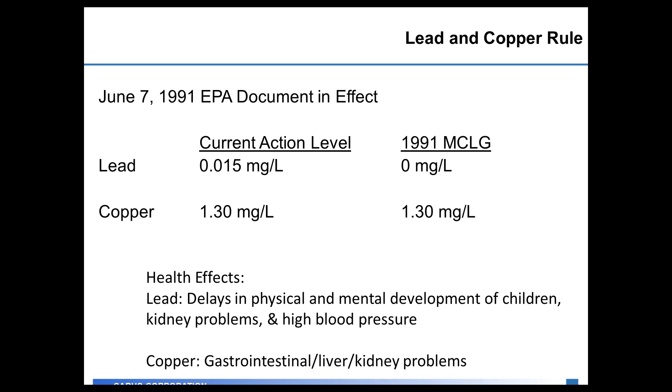The lead and copper rule is an action level. So an action level is different than a maximum contaminant level because in the distribution system, you only need to have 90% of the samples meet the regulation.

So what happens is the customer samples are collected and they're listed from lowest to highest, and you go up 9/10 of the way on the list, and that's the number that's used to determine compliance with the action level. So you're allowed to have 10% of the samples in the system be over the action level for lead and copper and still be in compliance in the distribution system.

Originally, the frequency is every 6 months for initial monitoring. If you continue to meet the action levels, you eventually can go to monitoring once a year, and then you will go to half the number of samples that you have to pull. And then finally, if you continue to be in compliance, you go to once every 3 years at half the samples for the system.

This rule is different than most samples because most samples are taken at the water plant for the water going out through the distribution system. Specifically for the lead and copper rule, this is a sampling of a first draw. This means the sample has to be 1 liter of water from a cold water tap that has not been used for at least 6 hours in the consumer's home.

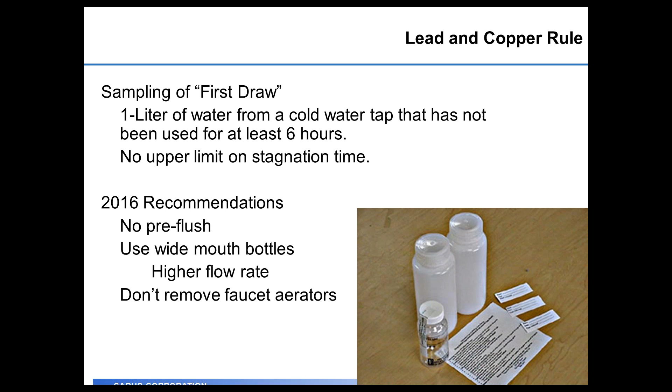So you collect your sample from the consumer home and you report your compliance. There are actions required if you have an exceedance, meaning you fail the lead and copper rule. The first part of that is distribution of public education. You need to notify your consumers that you had a violation of lead and copper rule and what that specifically means for them.

One of the things that Flint, Michigan brought up at the beginning of this year was that they needed to make sure that you notify the public within a timely manner for what the results were for their system. After you violated the rule, you also have increased monitoring of consumer taps.

If you were on reduced monitoring, which means samples every 3 years and half the number of samples, you now have to go back to the beginning and pull samples every 6 months and the full number of samples throughout the distribution system.

In addition to that, you're required to develop and submit a corrosion control plan, which tells what you're going to do going forward to prevent another lead and copper exceedance. This could be adjusting pH, alkalinity, hardness, or adding a phosphate-based corrosion inhibitor to the system.

Ultimately, they could also tell you to have actions required of a lead service line replacement out in the distribution system, and you should replace approximately 7% of your lead service lines per year. That's kind of a last resort for the US EPA in the States, but it's one of the things that's come up recently is that maybe we should focus on doing lead service line replacement going forward.

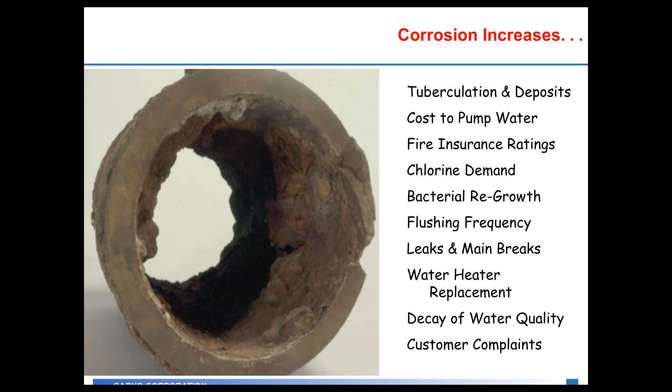Overall, all these issues above lead to a general decay of water quality in the distribution system, whereas the water leaving the plant may look crystal clear, may taste well, but by the time it gets to the consumer, it's picked up off flavors, off colors, and turbidity issues when it reaches the customer's home. All those things at the consumer's tap are going to lead to customer complaints, and they're going to either call you at the water plant or call someone at City Hall to complain about the source of their water and what's happening in it, and is it safe to drink.

When we talk about corrosion-influencing factors in drinking water, we really talk about four things. There's the electrical component. You have different types of metals in the distribution system, whether it be cast iron, lead, or copper, and you have water, which all can conduct electrical current. You have the chemical makeup of the water itself. So these are the things you measure at the water plant on a daily basis: the pH, the alkalinity, the total dissolved solids. The chemistry of the water going out the door impacts how it affects the distribution piping.

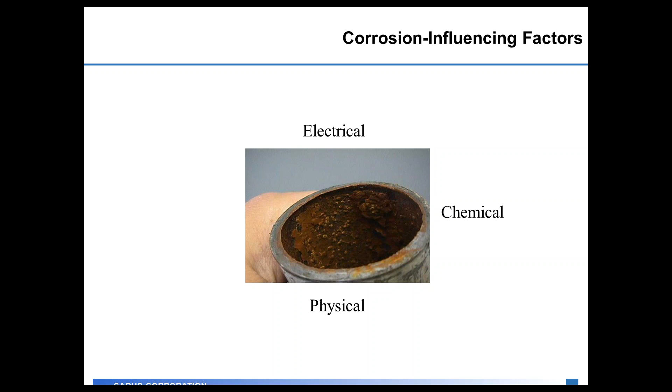There's a physical component. So what is the makeup of your distribution system? Do you have a lot of lead service lines out there in use? Do you have a lot of older homes that have copper piping with lead solder? Do you have cast iron distribution mains? Do you have a lot of plastic PVC pipe in the distribution system? You know, what's the physical makeup of your distribution system?

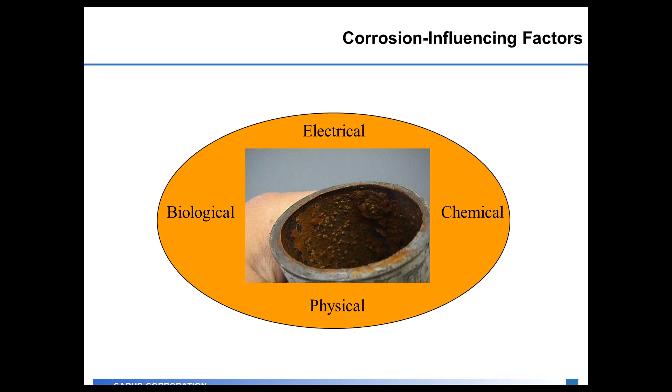And then finally, there's a biological portion to the distribution system. The reason that you maintain a chlorine or chloramine residual out in the distribution system is you want to keep those bacteria in control and not growing in the distribution system. If iron bacteria or sulfur bacteria start to grow in the distribution system, those can lead you to red water complaints in the case of iron bacteria, or hydrogen sulfide rotten egg odor in the case of sulfur bacteria. So now the water has picked up either a color or an off taste in the distribution system. It's those four factors all together that influence what type of corrosion you could have going on out in the distribution system.

Specifically, when we talk about chemical factors that influence corrosion, these are the main ones you typically look at. pH being the most common one. As we know, low pHs are acidic, and those would increase the corrosion rate on metals out in the distribution system. Typically, we think of higher pHs on the basic side of things as protecting the pipe by helping you to lay down a coating.

Alkalinity is another thing that we look at. Alkalinity helps you form that calcium carbonate white coating in the distribution system. It also helps you control the pH by buffering the water so you don't see pH swings out in the distribution system as the water ages.

You can have dissolved oxygen in the water, which increases the rate of corrosion. This will typically show up if you pull a sample of water at the consumer's tap and the water looks milky white for the first few minutes, but then as the bubbles dissipate, you no longer see the milky white, you have clear water. It's a hallmark that you have high dissolved oxygen in the water.

How much chlorine residual are you feeding, or are you feeding a chloramine residual versus a chlorine residual? The higher you feed your chlorine residual, that increases the type of metallic corrosion that you have in the distribution system as the chlorine interacts with that scale. Chloramines actually act differently than chlorine, and a lot of research has shown over the years that as you change from chlorine to chloramines to meet other regulations in the drinking water, it can impact your lead and copper numbers in the distribution system.

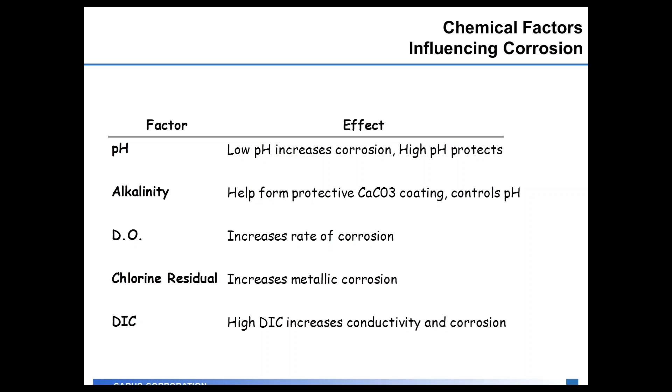When we talk about methods to reduce corrosion in the distribution system, we really talk about a couple different methods that you can use. The primary one for a lot of water plants was pH adjustment. It was the simplest thing for them to add to the system, and they could raise the pH up to make the water less acidic to help prevent corrosion in the system. Two other things called passivation techniques were really carbonate adjustment or calcium adjustment. By adding lime or soda ash or different chemistries to the water, you could help form that calcium carbonate coating on the inside of the pipe to protect the bare metal.

There are other methods to reduce corrosion. In your plant, you can have wholesale treatment changes where you reduce the DIC through either aeration, lime softening, or ion exchange. These would be wholesale changes to the water coming to the plant before you discharge it to the distribution system. Finally, one of the last things you can do is physical protection, where you do cathodic protection of tanks or lines out in the distribution system.

The way to think about this is you can't protect the whole distribution system, but there are certain critical parts of your distribution system, like the water tower or water tanks, that you want to protect. So you can either protect those with sacrificial anodes, or you could protect them by lining those tanks so that they don't corrode as quickly out in the distribution system.

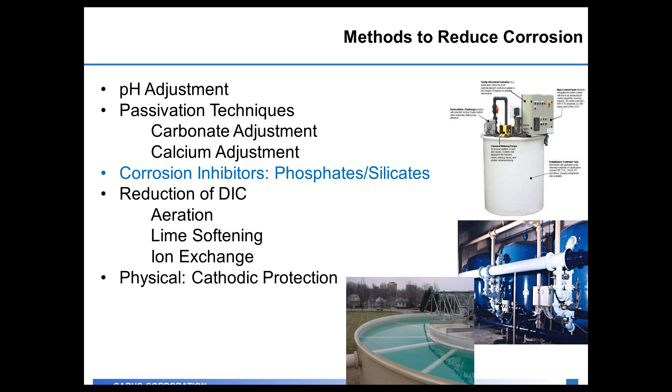Specifically here in this presentation, we're going to talk and focus on phosphates in drinking water treatment. Phosphates have been used for a very long time in drinking water treatment. The first recognized use of phosphates in water treatment was all the way back in 1887.

In the 1930s, specifically sodium hexametaphosphate was used for threshold treatment in potable water for control of calcium carbonate scale. Industrial plants would use this so that they didn't get the calcium carbonate scale impacting their boilers and water plants and having to shut down and acid clean that equipment. So they used sodium hexametaphosphate to keep that scale from forming inside those pieces of equipment.

In the 1970s, zinc orthophosphates were introduced for the treatment of low hardness, very aggressive waters with low pH that were causing red water complaints out in the distribution system for customers. In the 1990s, with the advent of the lead and copper rule in 1991, it set limitations on the amount of permissible lead and copper in drinking water at the consumer tap, and phosphate use expanded in the U.S.

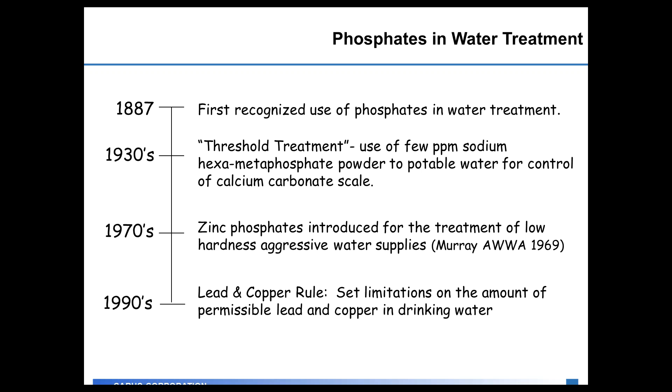When we talk about phosphate uses in drinking water treatment, we're really talking about two main applications. The first application being corrosion control, complying with the lead and copper rule, and then the other major use is sequestration, which is for color control, scale control out in the distribution system. In 2001, the last time a study was done by AWWA, it showed that 56% of all water utilities in the U.S. use some type of phosphate-based corrosion control and sequestration in the distribution system.

At the time of this study, they showed that approximately $200 million were spent annually on phosphate products in drinking water. The results of that study also showed that it resulted in $4 billion in savings to those municipalities that were feeding a phosphate-based product, or what that means is a 20-fold return on investment. How AWWA came up with that number was every time that you flush water that you're not recouping the cost, there's a cost associated with that. Also, when you collect samples and have to pay for the testing to alleviate the concerns of consumers, there's a cost there.

The replacement of infrastructure. If you can extend the life of that distribution piping and hold off replacing it for 10, 20 years, that's a huge cost savings of having to replace that distribution piping. It's one of the things in the last couple of years that AWWA has focused on, that the aging infrastructure, specifically on the water and wastewater side, is going to have to be replaced in the coming years, and there's a huge cost associated with replacing that distribution piping.

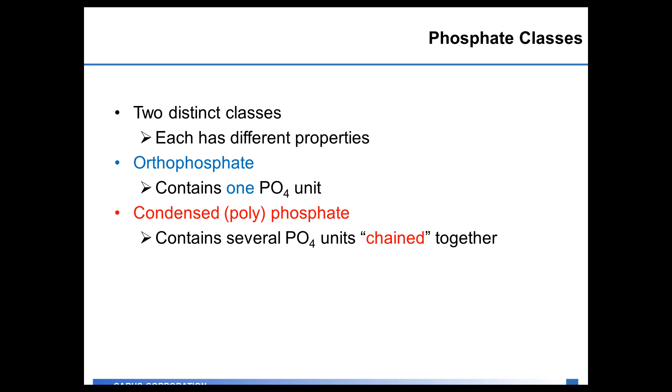So when we talk about phosphates and their two different uses, there's two very distinct classes of phosphates. There's an orthophosphate, which contains one PO4 unit by itself, and there's what's called condensed or polyphosphate, which contains several PO4 units chained together. In the case of orthophosphate, the simplest phosphate molecule out there, it's one PO4 unit by itself.

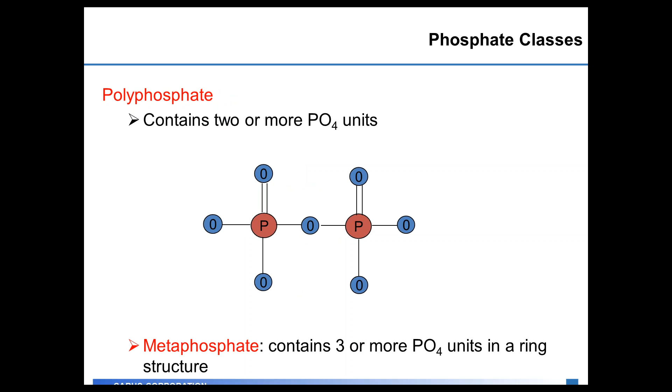Polyphosphate, which contains two or more PO4 units linked in a chain, will be used for sequestration. And then as I talked about earlier in the presentation, sodium hexametaphosphate is three or more PO4 units in a ring structure versus a straight line chain. We'll talk more about what ortho and polyphosphates do in the next couple slides in the presentation.

Specifically, the corrosion control mechanism is that we know phosphates form films over pipes or metals out there in the distribution system. Specifically, phosphates are anodic film formers in the distribution system. They're also acting as a cathodic inhibitor in addition to the anodic film former, providing a barrier between the metal surface and the oxygen in the water itself.

The research has shown that there's a very microscopic thin film that forms on the inside of the pipe, and these very insoluble compounds, phosphate salts, form on the surface. Even today, we're still doing research at AWWA and other national organizations to see how these products work in the distribution system based on the varying water quality we have across the U.S. But we know that we form this film that prevents metals from dissolving from the pipe surface into the water.

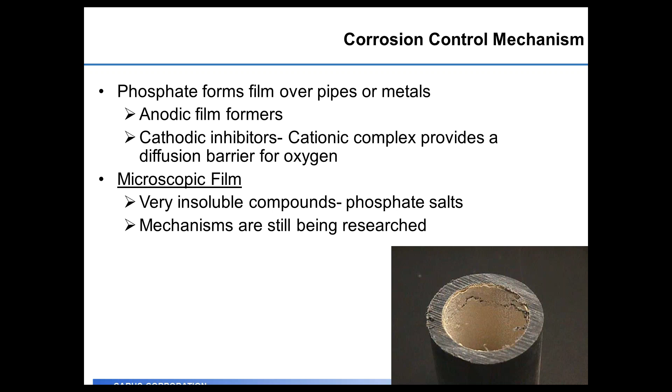Specifically, if you go to the AWWA national website or many other national websites looking at corrosion control, you can find a lot of articles on orthophosphate research. The articles will detail how the phosphate precipitates with the 2+ valence metals in the system, so they combine with the calcium and magnesium that form the total hardness in the system, and how they also bond with the iron pipe, the lead and copper pipe in the distribution system to form that thin film.

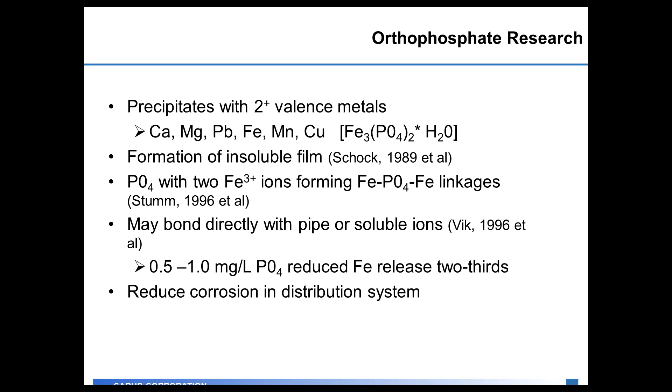Michael Schock has done a lot of research showing that formation of insoluble film with the phosphate products out in the distribution system. Some of the research shows that as little as half a part to 1 milligram per liter as orthophosphate reduces the amount of iron that would release from a cast iron pipe by 2/3. But overall, the whole body of research for orthophosphate shows that they reduce the amount of corrosion issues that you have in the distribution system. So they'll eliminate a lot of lead and copper issues and help with iron issues in the distribution system.

The dosage for a zinc orthophosphate would typically be 1/10 of a part to 1/4 part to as high as 1/2 a part as zinc out in the distribution system, and then anywhere from 1/2 a part to 2 milligrams per liter as orthophosphate in the distribution system. Once you started feeding the zinc orthophosphate, you would see that level of zinc and orthophosphate come out throughout the distribution system as that coating forms.

One of the issues with zinc orthophosphates is the wastewater plant in the municipality has a zinc loading limit on their discharge and on their sludge from the wastewater plant. So if you're feeding a zinc orthophosphate, one of the concerns is on the wastewater side, that zinc as it impacts the wastewater plant. One of the things that's happened in recent years is some plants have switched away from zinc orthophosphates to straight orthophosphate or blended phosphates because of this zinc issue at the wastewater plant.

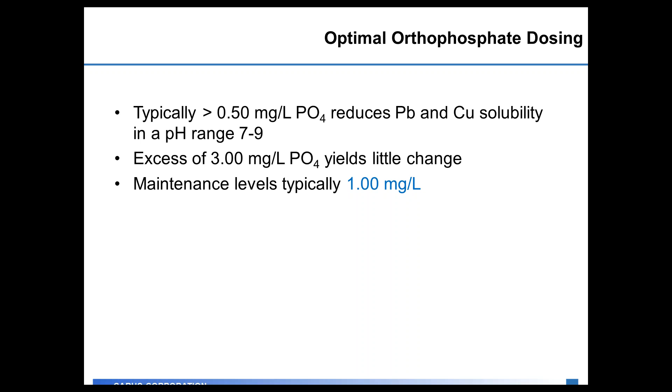So the first case study we have here is on Carus 4105, and the background of this plant was they were using pH adjustment for corrosion control. What they were using was two products: soda ash combined with calcium chloride. They were getting consumer complaints in the distribution system of a bad metallic taste to the water caused by the addition of the calcium chloride and the soda ash. They were still getting some periodic dirty water, red water complaints from iron corrosion in the system, and they were still having issues with the lead and copper levels being above the action levels, so they wanted to reduce those numbers as well.

The plant was a groundwater filtration plant, 1.5 MGD, and their water quality shows that there wasn't really any iron in the water leaving the plant at 0.04 milligrams per liter, so that would tell you the red water complaints were coming from corrosion in the distribution system because there wasn't iron in the source water. Manganese was 0.01 milligrams per liter, so below the 0.05 secondary maximum contaminant level. The pH they were adjusting to was 8.4. Their hardness was only 24 milligrams per liter, so very low on the hardness scale. Alkalinity down at 68 milligrams per liter.

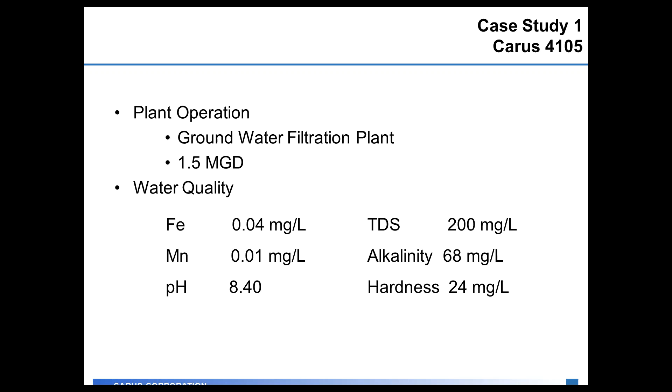So what they chose for their treatment was they were going to go to 100% orthophosphate product, and they chose a dosage starting of 1 milligram per liter as orthophosphate in the distribution system. The feed rate for that product was 23 pounds of product per million gallons treated.

When they made this change, they also looked at doing two other treatment process changes in the plant itself. So they reduced the pH from 8.4 down to 7.5, reducing the amount of soda ash that they were feeding to the water, and that saved them 37% in operating costs.

They decided that since they were adding the orthophosphate, they no longer needed the calcium chloride to add calcium to the water, so they completely stopped feeding calcium chloride, and that saved them 50% in operating costs. Combined in the reduction of the two chemicals that they were feeding prior to the phosphate addition, they were able to pay 87% of the cost of the phosphate product in reductions in the two other chemicals.

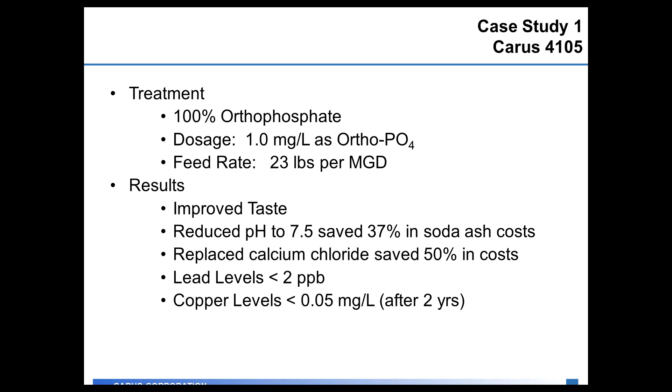What did this lead to? They had improved taste. They weren't getting customer complaints for metallic tasting water out in the distribution system with the addition of the orthophosphate. They eliminated their red water complaints that they had in the distribution system. Their lead levels dropped to less than 2 parts per billion, so well below the 15 parts per billion of the action level. And the copper levels dropped to 0.05 milligrams per liter after 2 years. So the treatment change worked across the board, providing better water quality to the consumer in the distribution system.

Sequestering mechanisms. So these are the bonding of a polyphosphate or a condensed phosphate to the metals that are in the water. The idea here is you prevent the chlorine that you feed for disinfection from oxidizing the metal that's in the water to begin with. Typically what you're focused on is iron and manganese. The result with sequestering is if you had iron, the prior water would be rusty orange once you add chlorine. If it's manganese, the prior water would be brown at low levels or black at higher levels in the distribution system.

The other application would be threshold treatment for calcium carbonate scale control. The idea here is you keep the calcium bicarbonate ion pairs from clustering to where they'd actually form a crystal and plate out and cause that distinctive white scaling you would see on the distribution system. The idea here is just enough phosphate to inhibit the crystal growth so you don't get the scaling issues you would see with calcium carbonate.

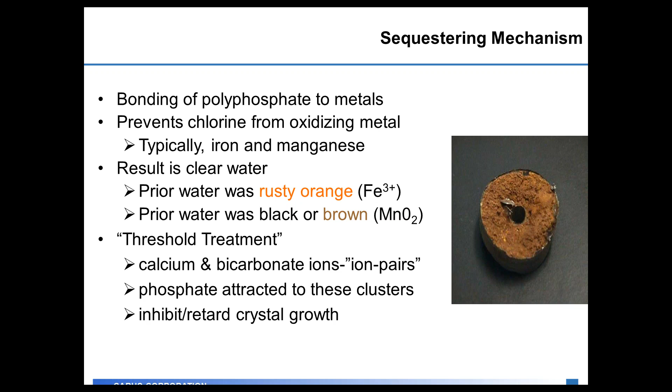Same thing here as with orthophosphate. There's been a lot of research done over the years for polyphosphate. You can go to the AWWA website, the EPA website, and look up articles. Sequestering of the metals depends on what the water chemistry is. So how much iron and manganese do you have? What's your pH? What's your alkalinity in your water? The research also shows that as you apply a polyphosphate to the water, it reduces the apparent color and turbidity, specifically for iron and manganese out there in the distribution system.

Polyphosphates have been shown to improve disinfection in the distribution system. One of the things polyphosphates will do is they'll sequester metals from that tuberculation and scale in the distribution system, and that allows your chlorine to more effectively attack the biofilms out in the distribution system. One thing that all polyphosphates do over time is they're going to revert from polyphosphate to orthophosphate. So one of the things to keep in mind if you're feeding a polyphosphate or a blended phosphate product that includes poly is that they do have a shelf life of 6 months to 1 year because that polyphosphate is slowly going to revert to ortho over time.

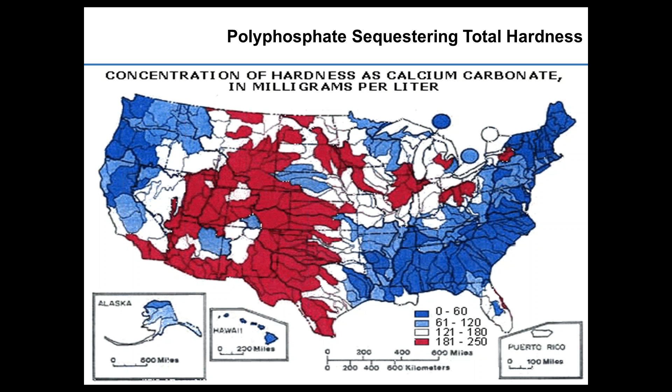One thing this map doesn't show is that groundwater can vary greatly from site to site throughout the U.S. What type of well you have and how deep the aquifer is will determine how much hardness you have to sequester in those wells. In the earlier case study for Carus 4105, that was at a shallow well in Florida that did not have much calcium carbonate influence, so it had a very low hardness. In the Midwest and other parts of the U.S., you can dig a well and have 300, 400, or 500 hardness in the water, depending on that aquifer. So that'll determine how much scaling issues you could have in the distribution system.

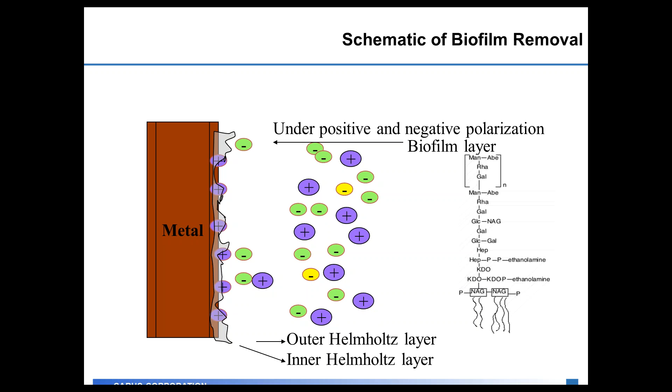What this shows is that over time, as you remove those metals from the biofilm and you maintain your chlorine and chloramine residual, you're able to clean up that biofilm and remove it from the distribution system and prevent any issues that that biofilm causes in the distribution system. It's one of the reasons why polyphosphates are fed in the distribution system, because you can help clean up that biofilm and scaling you have in the distribution system over time.

When we talk about polyphosphate dosing, the dosage can have quite a large range, anywhere from a half a part to 4 milligrams per liter as total phosphate. The dose for your product is really going to depend on what you have to sequester in the water. If you have a lot of iron and manganese in the groundwater to sequester, you'll be on the higher side of that dosage. If you have lower levels, your dosage will be on the lower level. One thing that some municipalities will do is when they do flushing in the distribution system, they'll increase their phosphate dosage to help break up any scale or tuberculation that's formed over the course of the year and allow that to be flushed out of the system by breaking up that scale.

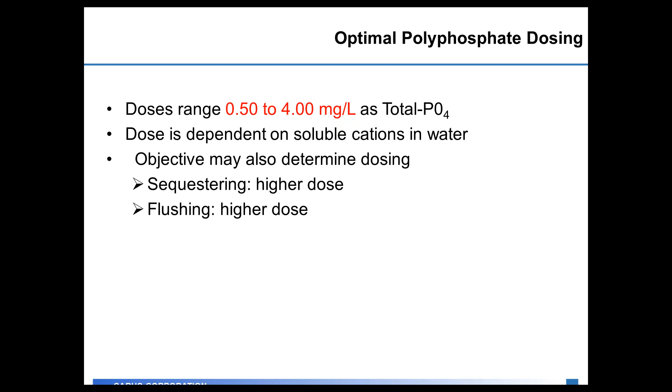So we've talked about polyphosphates for sequestering and orthophosphates for corrosion control. So in 1990, when the lead and copper rule was promulgated, a lot of systems looked at that they had two issues they needed to comply with. They need both corrosion control and sequestration out in the distribution system. So poly-ortho blended phosphates started to be fed to distribution systems throughout the U.S.

What they do is they provide moderate corrosion control, so some lead and copper control to the distribution system. They help you prevent and remove scale deposits of iron, manganese, and calcium carbonate in the distribution system. And because they impact the biofilms, they can help improve disinfection, because as you remove that biofilm from the distribution system, you don't need to feed as large a chlorine dosage to maintain the same chlorine residual throughout the distribution system. So the idea here, feeding one blended product to get you all these benefits to the drinking water.

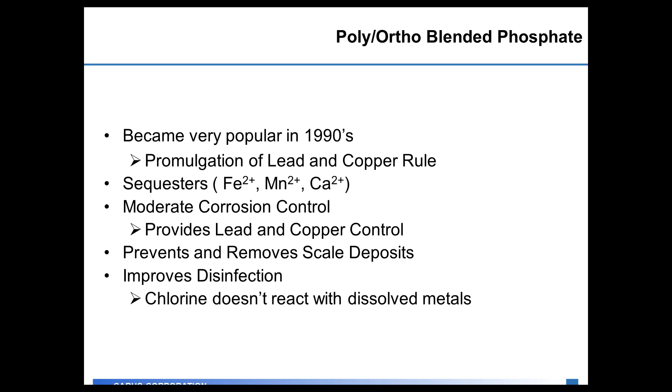The dose of the product that you're feeding is going to be dependent on the water quality and the type of blended phosphate product that you're feeding. Your objective is typically going to determine how much you're dosing. If you're only targeting really corrosion control in the distribution system, you'll be on the lower end of that dosage side. If you're looking at sequestration of metals in addition to corrosion control, then you'll typically have one of those higher dosages listed.

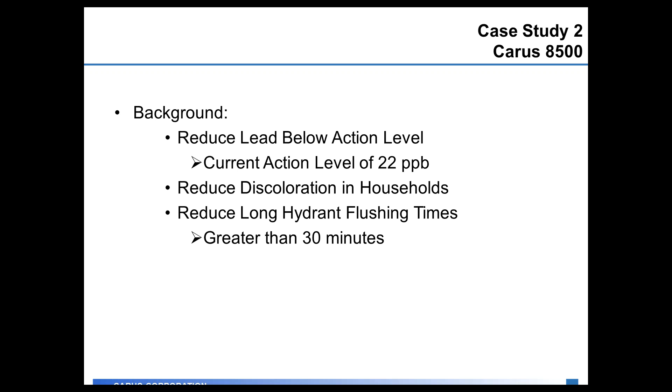Case study, this one is for Carus 8500. The background for this plant was to reduce the lead below the action level. They were currently violating the action level at 22 parts per billion, with the action level being 15. They wanted to reduce discoloration in households they were having, staining on fixtures and laundry in homes, and they wanted to reduce the long hydrant flushing times. When they were going out to flush hydrants in the distribution system, it would take them greater than 30 minutes of flushing water before the water in the hydrant would clear up.

They were a groundwater filtration plant, and they had 3 groundwater wells that they were going to treat. These plants were interesting because they had radium removal with HMO, or hydrous manganese oxides. The plant was 1.1 MGD from these 3 wells, and they served 7,500 customers. When you looked at their water quality, the pH was 7.3 to 7.5 in the wells, iron of 0.1 to 0.5 milligrams per liter, which could be some of the cause of the red water issues in the distribution system because you're above the 0.3 milligrams per liter for iron. Hardness was 280 to 340 milligrams per liter, and the manganese was low at 0.01 to 0.05 milligrams per liter.

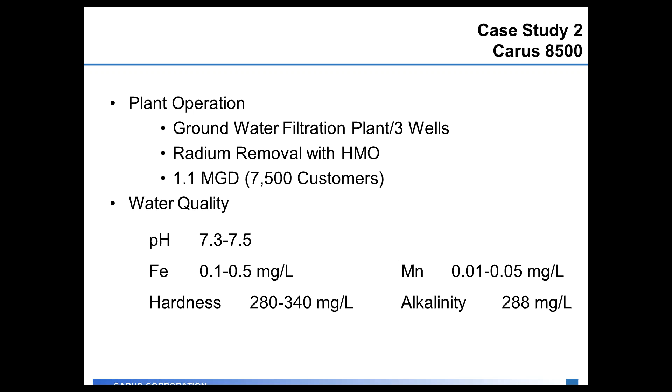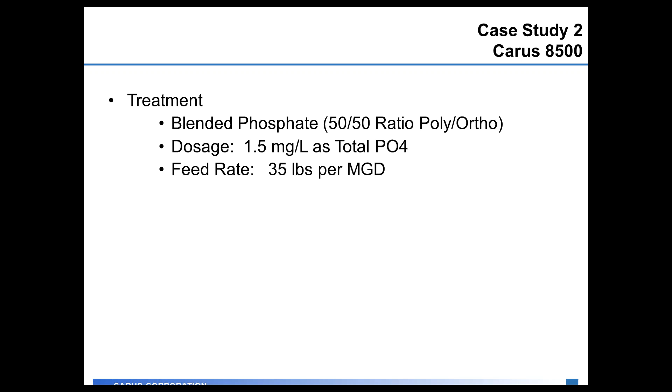So the product they picked for this water quality was a blended phosphate, and they picked a 50-50 blend of poly to ortho. Their dosage for the system was 1.5 milligrams per liter as total phosphate, so that would give them 0.75 as ortho and 0.75 as poly, and that feed rate translated to 35 pounds of the product per million gallons treated.

Within 90 days of applying the blended phosphate to the distribution system, they had lead levels drop from 22 parts per billion down to 7.5 parts per billion. So now you're less than half of the action level of 15 parts per billion. Hydrant flushing times were reduced from 30 minutes to less than 5 minutes. So this reduced the amount of operator time in the distribution system to flush those pipes, plus the amount of wasted water. And then the customer complaints for red water in the system got reduced from several a month to almost none. So across the board, the blended phosphate helped them meet all their treatment goals that they had in the system.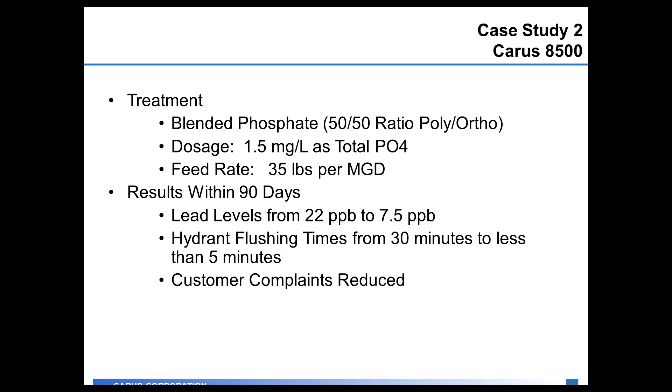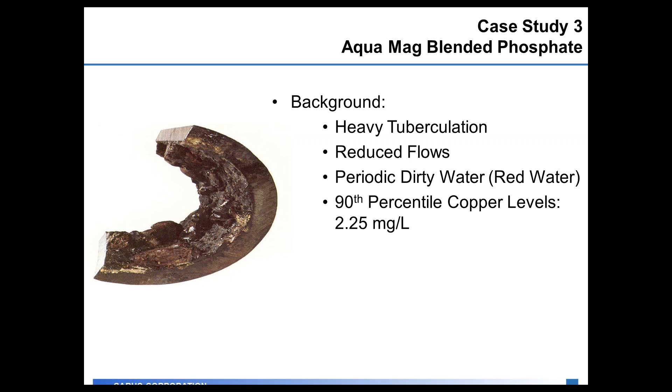Another case study, this case for Aqua Mag blended phosphate. The background of this plant was that they had heavy tuberculation in the system. They had reduced flows that impacted hydrant testing. They had periodic dirty water, red water complaints, and they had 90th percentile copper levels at 2.25 milligrams per liter, which was above the 1.3 milligram per liter action level.

The treatment plant was iron removal with aeration and then gravity filtration, and they treated 2.5 MGD. If you look at their water quality, they only had about 0.1 to 0.3 milligrams per liter of iron going out the door, so just barely below the secondary maximum contaminant level, which tells you that the corrosion and the red water issues were coming from corrosion of the distribution piping. Manganese was 0.01 milligrams per liter. The pH fell in the range of 7.6 to 7.9, and the hardness was 180 milligrams per liter.

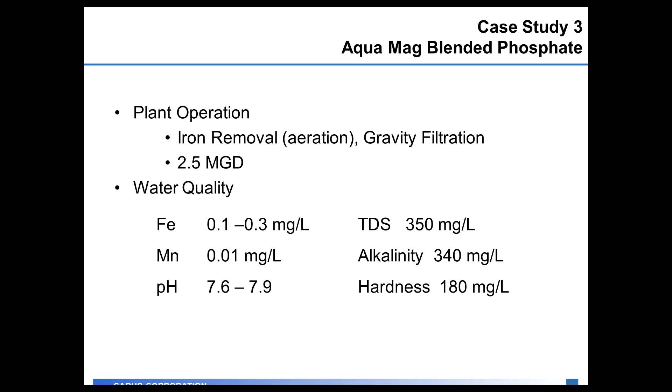So they chose, based on this water quality, to feed a blended phosphate in a ratio of 70 poly to 30 ortho, and their dosage was going to be 1.5 milligrams per liter as total phosphate. This led to a feed rate of 38 pounds per million gallons treated.

Because hydrant testing showed flow issues in the distribution system, they looked at the flow improvement from those hydrants after the application of the Aqua Mag phosphate. Depending on the hydrant they were testing, they saw anywhere from a 10% to a 40% increase in hydrant flow rates through those hydrants after applying the Aqua Mag phosphate.

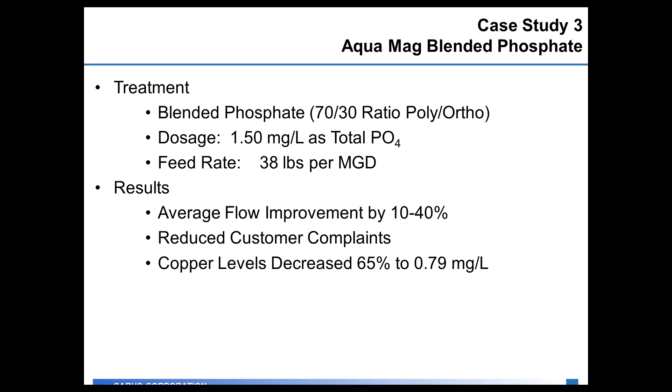They had reduced red water complaints in the distribution system as they were preventing those corrosion products from forming, and their copper levels decreased 65%, all the way down to 0.79 milligrams per liter, so they were below the 1.3 milligrams per liter action level.

So one of the things you need to keep in mind when you're picking a phosphate product is which phosphate to use. The choice can be as critical as the dosing. What you really want to look at is two different factors: what is the water quality leaving the plant, and what is the water quality in the distribution system, and does it change? Is the water quality at the plant perfectly fine, but when it gets out to the distribution system, are you picking up other issues?

Specifically, what types of problems are you having? What are customers calling you to complain about in the distribution system? Are they complaining about red water issues? Are they complaining about taste issues? If so, what type of taste issues? Basically, do some research when you're talking to these customers to find out what kind of issues you have in the distribution system.

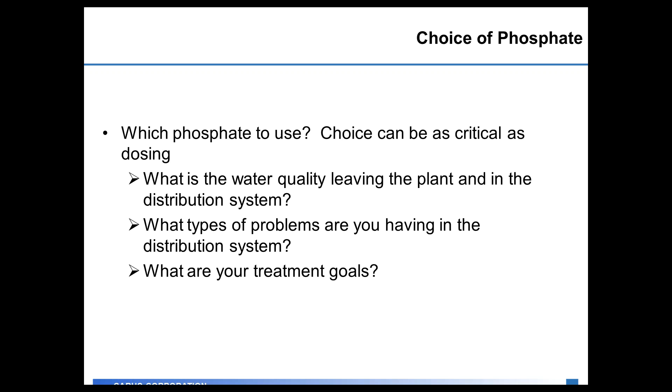What are your treatment goals? If you're going to add a phosphate product to the distribution system, are your goals mainly corrosion control? Are they mainly sequestration? Are they a combination of the two? That'll help lead you toward the product you would pick.

Things that we look at at Carus when we're selecting a product and the dose: we would like to determine the hardness of the water in the distribution system, and how much iron and manganese you have after filtration, or oxidation and filtration if you have it, keeping in mind that if you're above the secondary maximum contaminant levels for iron and manganese, you'll need to do sequestration to prevent those from precipitating out in the water.

We want to look at the orthophosphate if you're a groundwater plant, because you'll typically have some background orthophosphate. When we pick a product and a dose, you take your background orthophosphate and add it to the selected dosage, and know that you need that combination. So if you had a background ortho of half a part in some wells, and your target dosage is 1, you really need to see 1.5 in the distribution system to be at your target level, because you have that half a part in the background.

And finally, what's the pH of your water in the distribution system? With a blended phosphate, you can be between pH 6 and 9. Ideally, we'd like you between 7 and 8 to be optimal. Specifically, if you use a zinc orthophosphate, you really want to be between pH 7.3 and 7.8 for the optimal process, or on the far side, 6.7 and 8.2. Typically, we'll look at the water quality at the plant and in the distribution system when we make a product selection and a dose.

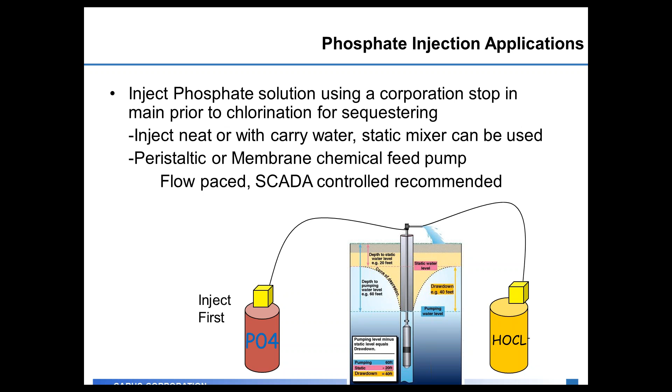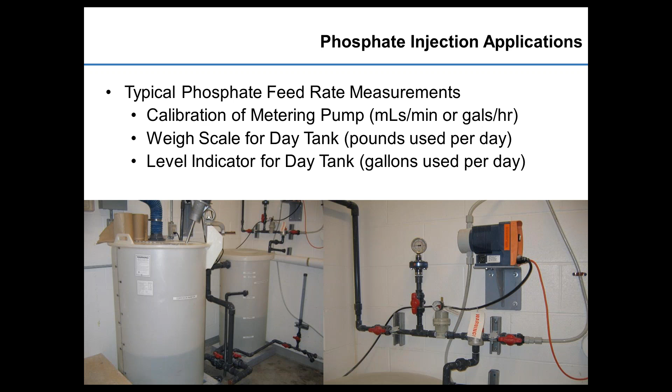In this case, you can see a small mini bulk system with 2 tanks and a mixer where they're mixing dry phosphate into solution, and then the metering pump mounted to the wall, applying it to the water itself.

In addition to measuring the levels of phosphate that you're feeding out of your tanks, there's also ways to measure the phosphate out in the distribution system. We typically at Carus use the US EPA approved ascorbic acid method 8048, and it measures orthophosphate residual in milligrams per liter. It's a very easy test. You add the powder pillow, you wait for 2 minutes, and the sample turns light blue. After the sample turns light blue, the darker the color becomes, the higher the level of orthophosphate that you have in the system.

This test is relatively easy to run, and you can run it when you collect free chlorine or chloramine samples out in the distribution system. Just collect more sample and then run this as a separate test so that you have data on what the orthophosphate levels are out in the distribution system.

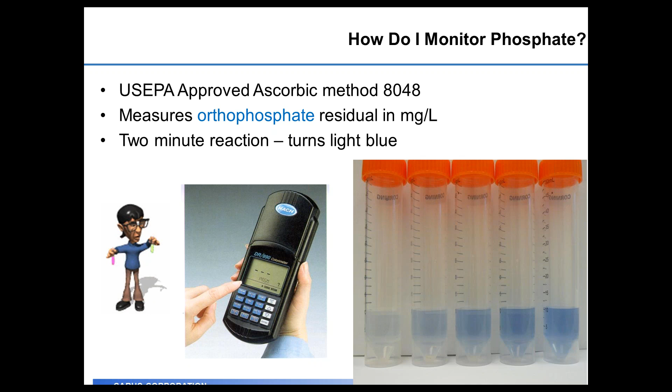Typically, for a customer that's feeding a phosphate product, we'd ideally always love to see orthophosphate tests at the finished water tap at the treatment plant itself. We'd love to see some samples out in the distribution system at multiple points so you have an idea of what the orthophosphate level is in the distribution system. And then we want to focus on places where you have issues or dead-end lines where you might see a drop-off in chlorine residual or other water quality parameters, and see what the levels of orthophosphate are there.

There's some other things you can look at if you're picking a phosphate product for the first time or you want to monitor what your current program is versus a new treatment change. You can do coupon-based monitoring. This is the NACE protocol, National Association of Corrosion Engineers, and what you're looking at is putting test coupons out in the system and looking for how much of that coupon erodes over the course of a year in the case of mils penetration per year, or MPY.

Typically what you're going to look at is a test duration of 30, 60, or 90 days, with 90 days being most common, because in the first 30 days these new pieces of metal corrode faster than they would do over the long term, and so your numbers have much more bounce in the shorter coupon tests.

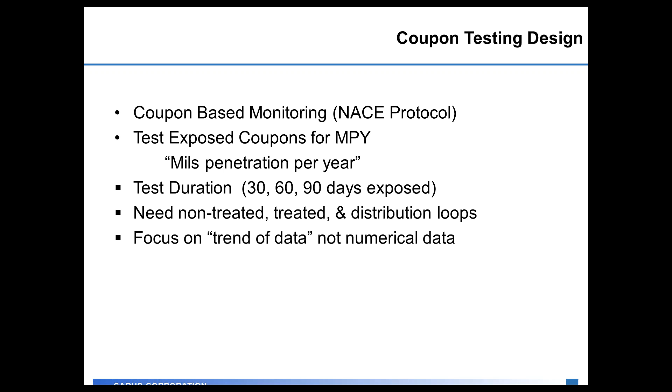Specifically, here's a picture of a coupon rack. The typical rack that you would see in the distribution system would be a 3-position rack, and you would have copper, lead, and mild steel coupons that you would put out there in the distribution system. The rack is controlled with the silver dole valve that impacts how much water would flow through the rack. Typically, you're going to control it at 1 gallon per minute or 2 gallons per minute going through the coupon rack in the distribution system. And like I said earlier, you'd have 2 of these, one on treated and one on non-treated water.

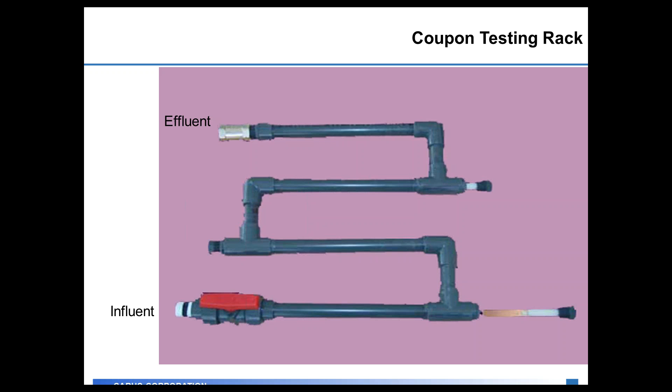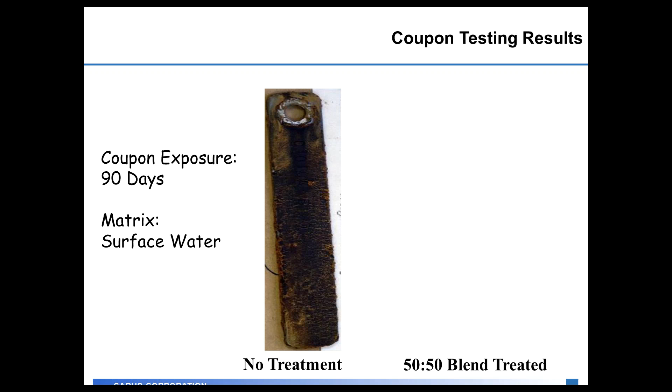When we look at the coupons, you're obviously going to get some numerical data, but you can also physically look at the coupons when you put them in and pull them out. In this case, this was a coupon exposed to Florida surface water for 90 days, and this was the mild steel coupon, and you can see the rust and scale that had formed on the coupon itself with no phosphate treatment.

The coupon to the right was treated with 50-50 poly-ortho blend, and you can actually see the coupon, you can actually read the coupon number on it, and you have a little bit of formation of rust on the sides of the coupon, but physically you can see that the treatment change made a very drastic difference to the water quality. And that's one of the things you can do with coupons, is make a treatment change and then see both physically and then in the numbers, did you make a change for the better for corrosion control in your distribution system.

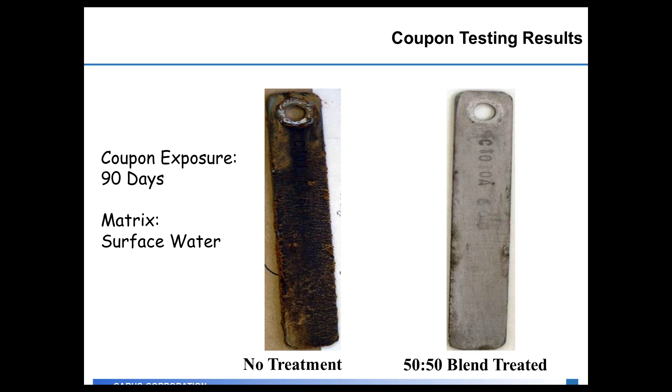One of the last things I like to touch on during any presentation is the personal protective equipment for the operators handling these products. Specifically, if you're using PPE for phosphoric acid or zinc orthophosphates, the pH of these products is typically less than 1, and they're considered corrosive inorganic liquids. So the PPE that an operator should be using when he handles these products is goggles and/or a face shield, rubber or appropriate polymer gloves, a rubber apron.

If you're taking a bulk delivery, then you may even want to upgrade all the way to a complete acid-resistant suit and rubber boots. Basically, the amount of exposure that you could have to these products, since they're corrosive acids, you want to be geared up depending on what could happen. These products, both phosphoric acid and zinc orthophosphates, are considered DOT hazardous for shipping, so the truck has to be placarded and all the right labels attached to it.

One of the reasons that blended phosphates are picked is the PPE requirements go down, or you can also see some pH-adjusted orthophosphates like monosodium orthophosphate used. The reason for these products being picked is because safety goes up immensely. The pH for these products is typically neutral, somewhere between 5 to 8 or 9, depending on the product type you're using. And the PPE goes down to safety glasses or goggles if you think you have a splash hazard with the product, and then rubber or appropriate polymer gloves if you think you're going to get in contact with the product.